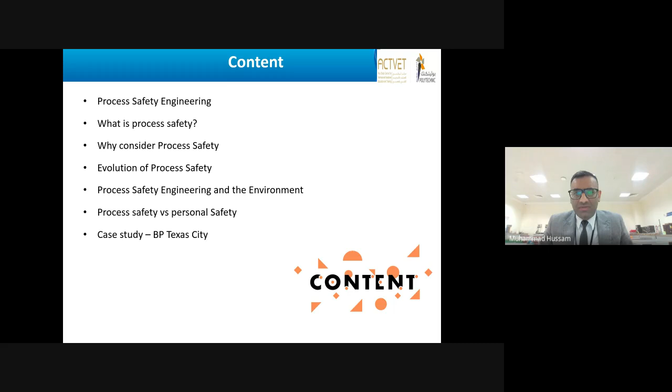And we also need to link it with the environment. All these processes, all these operations, they're linked with environment in one way or another. Are we taking into consideration whether our actions have any impact on the environment? Have we done proper impact assessment? Have we looked into what are the hazards associated, and so forth? So all these process plants, all these refineries, all this overall infrastructure has an environmental impact. So it has to be considered how it will impact the overall environment.

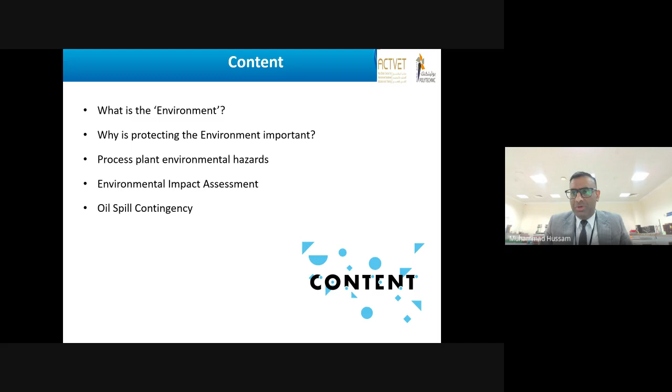So you're hearing in all sorts of different seminars, symposiums related to energy transition, related to green energy, related to saving the environment, saving the planet. It all boils down again to the operational excellence, how that operation or that process has been designed so that it has a minimum impact on the overall environment and so forth.

So we will try to look into an overview of process safety, safety engineering, and then process safety and personal safety. When we say operational excellence, it has to do with competent people as well. Are they trained enough? Do they have the right skills to run that process? Are there any training protocols? Do we have any safety protocols in that very environment that we're working in? So these things are linked together. So we have to see in a broad perspective how these things are linked. Now, going directly into the outcomes and so forth.

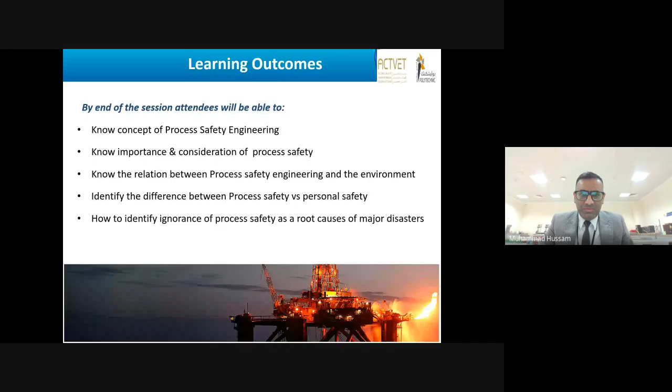So we want you to understand process safety engineering, the considerations, the relationship between engineering and environment, how process safety and personal safety are linked, and, in the simplest way, what the major root causes of any disaster are. It can happen in upstream, it can happen in midstream, it can happen in downstream. It's everywhere. So we have to consider operational excellence and so forth.

I'll just jump straight to the topic. So what exactly is process safety, and how is it linked with operational excellence? We can have multiple different things that can go wrong. We can have various accidents. We can have explosive materials that we're dealing with. We're dealing with high pressures, high temperatures, high flow rates, high levels. We're dealing with chemicals, different dangerous substances and so forth.

So overall, in a safe manner, I'll give you an example of getting a driving license. You go through a theory test, a practical test, then the test itself, and then you get a driver's license. Even when you get a driver's license, in your first few years you're very cautious about things that can go wrong, how to turn left and turn right and so forth. This is a very minor thing, a very small process, but it has lots of implications.

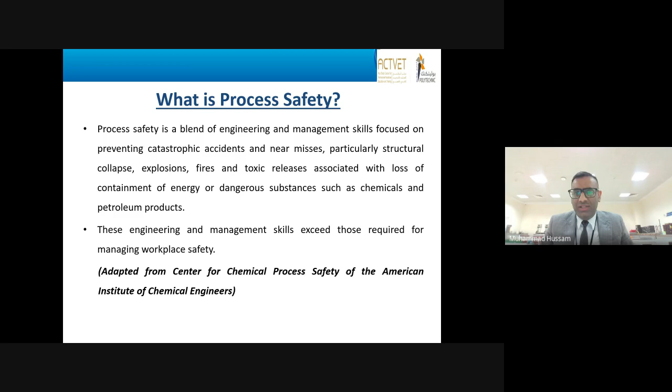If you don't drive safely, you're putting others' lives in danger as well. You can damage your own car, you can hurt yourself as well. So we have to consider the excellence in the process. We have to understand what we are trying to achieve, what exactly is the objective of the overall process that we're dealing with. There are technical aspects of safety, and there are management aspects of safety as well. So it has to be considered as a full spectrum, where we're dealing with engineering skills, management skills, and managing the workplace safely and effectively.

As I said, we're dealing with lots of different hazards in manufacturing facilities, processing facilities, hazardous chemicals. Maybe we're working at heights and so forth. Specifically, if you're working in an offshore environment, we have to consider the overall safety of the process, and at the same time, we have to consider the deliverables. Organizations and nations don't invest in something they feel won't give a return. So if we are not doing it in a safe way, in the manner it's supposed to be done, overall productivity will go down, profitability will go down.

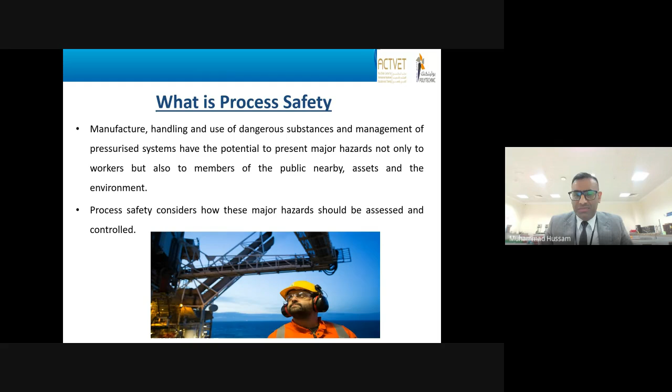We are exposing the public, our infrastructure, our assets, and also the environment to a situation which could be hazardous and dangerous. So we have to define the safety element, the excellence element, and then see where we are, how the overall process is designed and managed. It's a continuous cycle where we monitor, we learn from the mistakes, we report it, and we try to improve it. In the later half of the presentation, we'll look at some excellence protocols in terms of management and personal safety in a bit more detail.

When we talk about engineering itself, we have to consider the design and analysis of the process equipment we deal with on a daily basis, and the risks associated. There are multiple examples around you on a daily basis dealing with safety. We go to the doctors. Doctors have to be competent enough to give proper treatment. In surgery, a minor mistake can lead to a very serious health situation. Similarly, if we are not designing our process plant or facility in a safe and proper way, it might lead to a very disastrous situation.

So whenever any process facility is designed, they consider the worst case scenario, what could possibly go wrong, and do we have contingency plans: plan A, plan B, plan C? Do we have dedicated people who will respond to an unexpected situation? Do we have sensors or systems in place which can inform us at the right time, so we can save the overall process? And the processes are linked with each other. Take the example of drilling. Everything is integrated with each other.

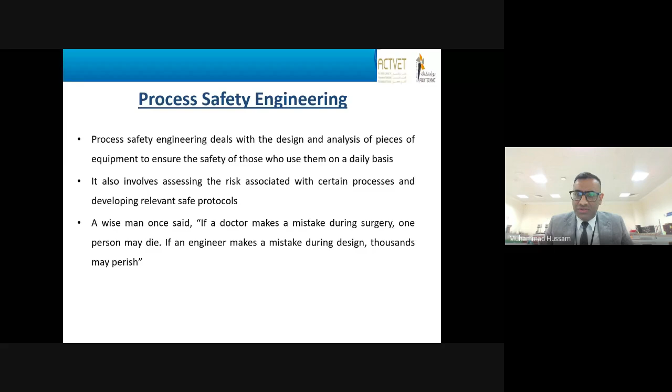If the BHA is not working, or if the BHA is clogged, it has an implication in overall drilling of the well. If for some reason the annulus is blocked and we are not circulating properly, that also has implications. If the drilling mud is not the right density or the right specific gravity, we are losing hydrostatic pressure. So everything is linked together. When you design it, you design every element in the right way, and everything has to complement each other so that the overall process is as safe as possible.

Why do I need to consider process safety or process excellence? Threat of serious injury or fatalities, loss of production, legal actions. These days, different nations are very strict about safety regulations, and if you're not doing it in a safe manner, then there are legal implications as well. You have to pay hefty fines. There are lots of examples where there were spills in the seas, and the companies had to pay literally billions of dollars as part of the legal action that was taken by the nations.

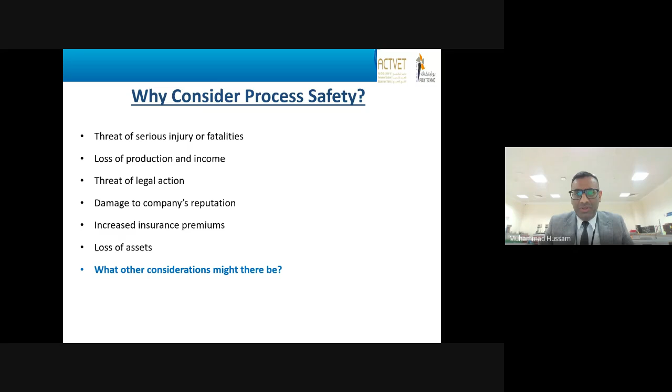The overall company's reputation can be damaged right away, that this company is not working in a safe manner, they don't have the right skills, or they don't have the right attitude to work in a proper way. And all these big infrastructure facilities are insured, so your insurance premiums can go high as well. Loss of lots of assets, and so forth. So there are lots of considerations. You're a student, working or studying in different domains, so we have to consider all these safety aspects.

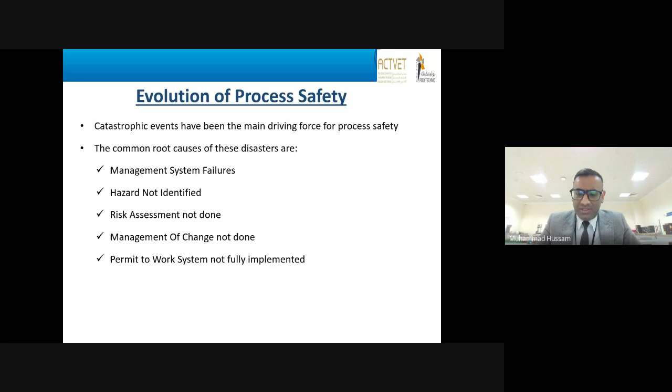So, evolution of process safety. There are various events that have led to where we are right now. We have various disasters that have led to, let's say, management system failures, hazards that are not identified, risk assessment not done properly, management of change that has not been done, permit to work systems that were not implemented properly. So we have learned so much as part of process excellence over the years. These are some of the case studies of events that have happened over the years.

There was the Flixborough event in 1974. It led us to understand what hazards are, management of change, impact, and so forth. We had Seveso in 1976, where lots of chemicals were released, and protocols were established related to vapor cloud explosions. Then in Mexico City, there was a boiling liquid expanding vapor explosion, and so forth.

That has also led to understanding the protocols about how the liquid has to be expanded or stored, and so forth. Then there were some refinery incidents, specifically Bhopal, and then BP Texas refinery as well, that led to very serious consequences. Piper Alpha, that's a platform offshore oil rig that was burned, also had lots of consequences.

So the safety process or the excellence process has evolved because of these incidents. Each incident is an excellent case study to understand what went wrong, why that has led to where we are in that particular situation.

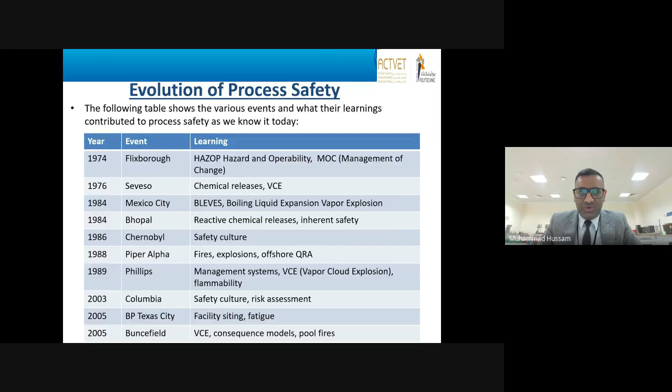This was a Chevron Richmond refinery. If you watch this short video, you can think about what impact it had on the environment and what management did. They already knew there was significantly something wrong in the distillation column, and they did not look into the overall maintenance of it, record of maintenance, and these incidents could have been avoided.

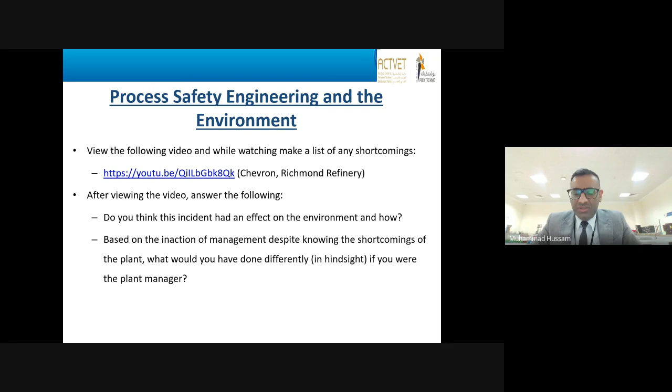Just because we don't have the right attitude at that moment, because of the cost implications, because of the management issues, it has led to very serious implication, and that has caused both the damage of the equipment, loss of property, loss of the lives, overall.

Personal safety and process safety, both of them are linked together. In terms of process safety, we have to consider what processes, what are we dealing with? Are we dealing with extremely dangerous chemicals? We're dealing with high temperatures, we're dealing with high pressures, we're dealing with overflows, what exactly the overall objective of the process is.

Also what can go wrong. Do we have the right knowledge? Do we have the right experts? Do we have all of the right tools available? Do we have training infrastructure? Do we have continuous improvement, and so forth?

And this is an expensive thing. As I said before, companies do not want to invest in something where they feel that the returns are not going to happen. If you're a businessman, you start a business and put in a certain sum, and at the end of the month you're expecting a certain return. If the return is not there, it means your business is in loss, and you want to look into some other resorts, or other potential businesses which can give you a return.

Similarly, process operational excellence is linked with process safety. If we are not working safe, there will be lots of downtimes. There will be people who have lots of injuries. There will be high insurance premiums, and overall it will be expensive.

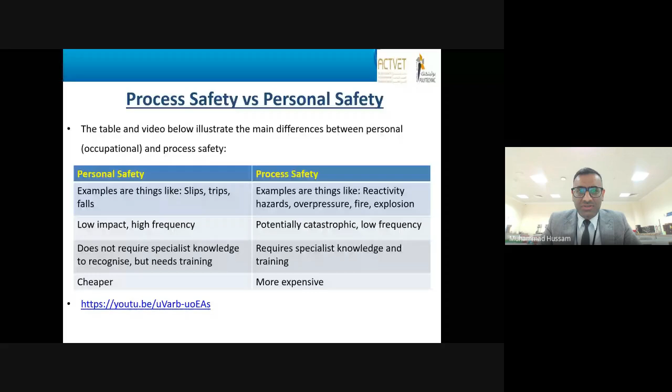I'll give you a brief overview of what happened in BP Texas refinery. It was a flaw in the distillation tower or distillation column, where the pressure was not sustained. As you know, in refining, the temperatures can exceed very high, and if the pressure is not sustained, the vapors can blast. That's exactly what happened. Since we are dealing with refining crude, there were various fractions, and the pressure was not sustained.

There was a flaw in the distillation column design, and that led to BP's Texas disaster. I think 15 people lost their lives. These are very classic examples that show we have to consider safety and operational excellence in almost every aspect, specifically when dealing with bigger infrastructure where energy and environment are linked together. This was one of the figures I found from the Texas refinery.

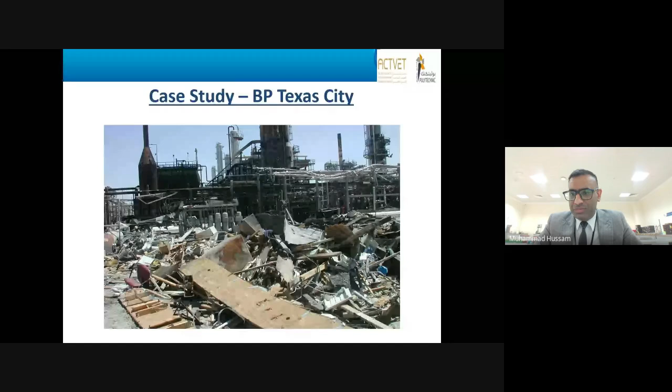So you see the overall loss of lives that occurred. The infrastructure was damaged, and then they have to pay legal implications. They have to pay lots of fees as well.

Now what are the pillars we want to see as a general understanding of success when we're talking in terms of operational excellence? We have to understand the core principles, the real plant applications, what we're trying to achieve. We have to identify the challenges, and also identify the solutions.

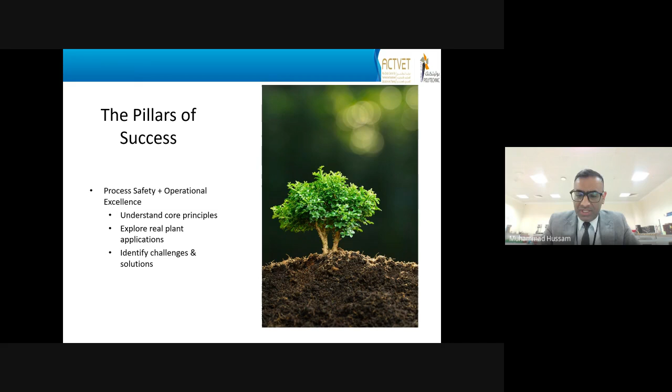In terms of challenges, for heating and cooling, do we have the right capability? Do we have the right storage? Do we have the right infrastructure? Do we have the right capital? Are we managing the cash flow and so forth? There are lots of things in terms of process safety and operational excellence, and they go hand in hand. If we don't really understand the principles, then we are not able to identify the challenges, and we cannot provide the solutions.

Simple process safety: we have to identify the hazards. Hazard identification needs to be there. It's a very simple matrix — first we need to identify a hazard, what is its likelihood, what is its severity, and based on that we can identify whether it is a low frequency hazard or a high frequency hazard, or whether it is likely to happen.

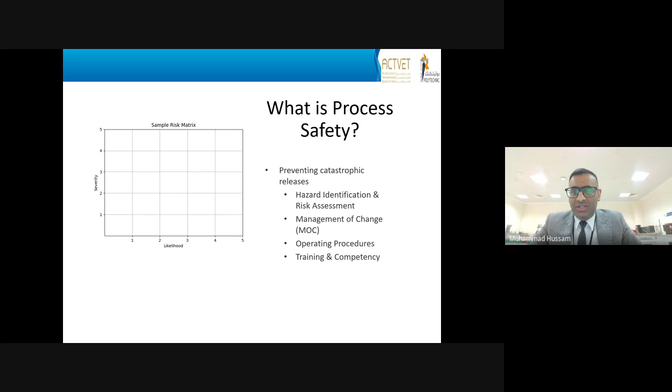Once that's done, the management has to consider what practices they need to put in place for overall process safety and operational excellence. Then operating procedures — do we have them in place? And training and competency — every step has to have training, and there has to be competent people to make sure they're doing things properly and are trained.

This is a very interesting thing, which is hazard and operability study, that we have to again identify. There could be different calculations of it. There are different examples of it. There are different benefits and so forth. So these have to be considered accordingly.

So if we say risk calculation, we have to consider the preparation. The team has to review it. They have to identify the hazard, and they have to evaluate the risk and so forth. Based on that, we are basically considering it.

For example, an overpressure in a reactor — is it major? Is it possible? Is it something which is hard to detect? And do those inefficiencies exist, or do we have safety norms in place?

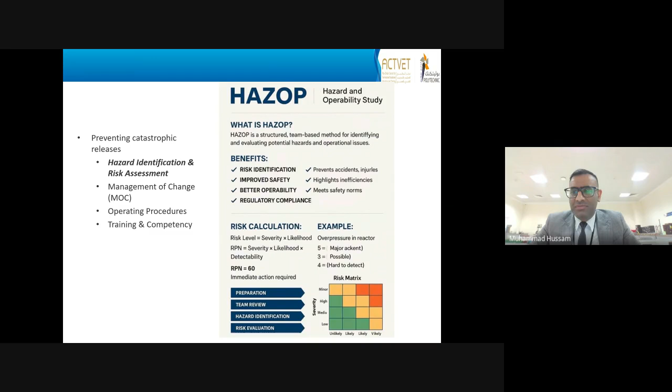So this is something pretty basic for any industry we're dealing with. HAZOP has to be structured, it should be able to identify and evaluate operational issues in any process plant.

Then management of change. This is basically related to how we document the overall process. Do we have a certain approach where we identify things, and then see what incidents and operational disruptions occur? We review the risks, and then do we have a change? Do we have risk assessments, and based on those, a structured approach where we do approvals, disapprove, implement, and there has to be a review process.

Another example is accreditation. When any accreditation body comes to a facility, they will look at what we are doing and how we are doing it, and to back this up we need documents, and those documents have to follow certain protocols and SOPs, giving evidence that it's there.

In big process facilities, whether petroleum refining, manufacturing facilities, or chemical reactors, there has to be a chain of command. There has to be management in place to approve, review, and monitor on a daily and monthly basis, seeing if targets are met, what the downtimes are, whether we have maintenance logs for these facilities, enough capital to cover costs, and agreements or proposals in place for if something goes wrong.

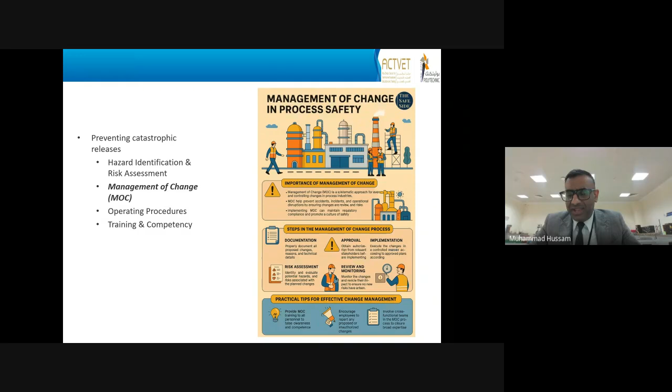So identifying hazards, we need to implement these processes for operational excellence. Operating procedures, training, and competencies are an extremely integral part of overall excellence. In any organization, if you're just sitting in one place, you're not learning or growing in your career. Same goes for these process plants. They have to upskill as technology changes.

For example, in terms of energy consumption for a certain process, if you look ten years back versus now, the sensors are more integrated, they consume less energy, and they give you a better experience. So these plants have to upskill and upgrade their facilities every now and then, and also upgrade the people who are there, making sure training happens.

The training and development has to be there, with proper support and clear goals. The learning has to happen, and it has an impact on overall operational excellence. If people are competent and their skills are developed over time, it means we are doing something right towards achieving operational excellence.

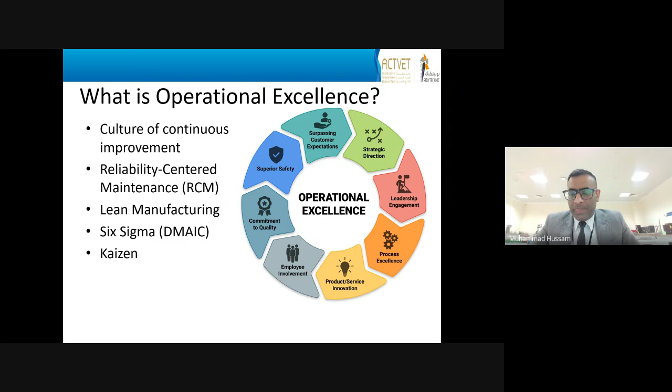In terms of reliability centered maintenance system, the first thing is operational excellence, which comes with cost effectiveness and making sure we have proper, improved reliability procedures in place. People are communicating with each other, there are proper documenting procedures, resources are available, and you have clear objectives. If the objective isn't there, it means we're not monitoring things properly. Things have to be monitored, documented, and reported properly, leading to excellence across operations like refining, drilling activities, and downstream distribution networks—everything is linked with these major terms.

This is another aspect of the manufacturing model, where we have continuous improvement, value stream, and flow, pulling things together. In the middle, there's a proper culture where we respect the people, promote them, listen to them, and give them the right resources, skills, and safety equipment.

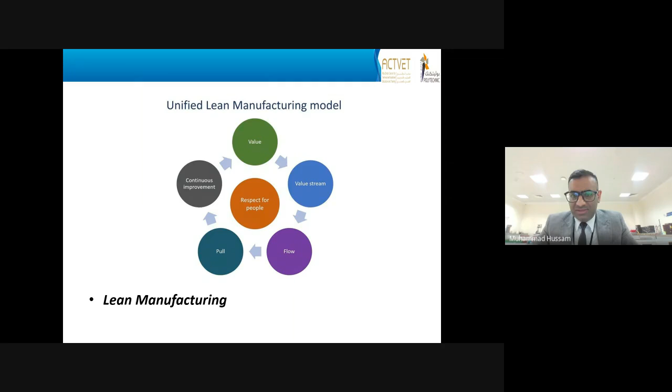It has to be according to certain specification. If those specifications are not met, it means that we're not doing something right. There's no continuous process in place. If we see there is a discrepancy, we have to report it and we have to try to mitigate it. And overall, these things are linked together in order to achieve operational excellence.

These are Six Sigma, let's say, frameworks. We call it the define, measure, analyze, improve, and control framework. These terminologies, they look very simple. But if you look into it or try to understand it in a bit more detail, you'll see that things can be very simple, but we can make it very complicated. Define the problem. What's the problem?

If, let's say, your car is not working, there could be hundreds of things that can go wrong, related to engine, transmission, related to electrical systems. So we have to define the problem. Where is it? Quantify it. What's the likelihood of it? What impact does it have on the overall problem? Then analyze that problem. How can we improve it? The cause of it.

Then again, here risk assessment comes very handy. And then you have quality improvements, continuous quality improvement. You improve it, you implement the strategy. If that strategy doesn't give you the results, then you go back in and analyze it again and see where we went wrong. And then we have got proper control of the overall procedures, overall practices to get the excellence we need,

and so forth. So these frameworks, they're, let's say, simple, but when you're executing them, you see that there are lots of technical challenges. It's not as simple as this; we might have a challenge of, let's say, a technical drawing. We might have a challenge related to extreme pressures, extreme temperatures where we're not able to see the root cause. We are unable to give the output that's there. So we have to identify, define, and control, and so forth.

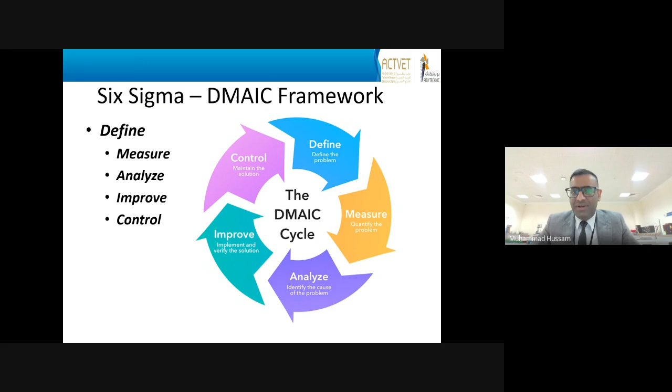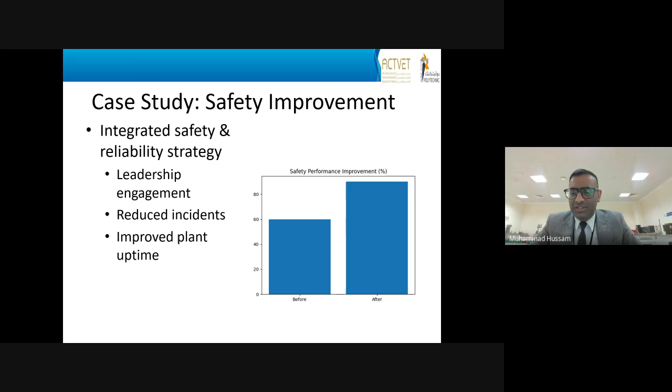and so forth. And we can look into various different case studies around the world in process plants, in refineries, in chemical manufacturing facilities. They can lead to lots of these integrations, and so forth.

This is another important thing: when we say integrated safety and reliability strategy, what exactly do we mean by that? There are lots of things, as simple as, let's say, we don't really bother about that problem. We can have a reactive approach. There is an effective approach. There could be a proactive approach, and there is an enlightened approach as well. So it's about the discipline. It's about realizing your mistakes. It's about having the processes in place, and then continuous improvement.

For example, our graduates, when they go out, we have an exit exam, and that exit exam gives ABET an idea that we are looking at the quality of the graduates that are going out. And for each course, at the end of the course, there are surveys. The management looks at those results, and based on those results, they see what is the performance of the employee, what is the performance of the teacher, and also the performance of the students.

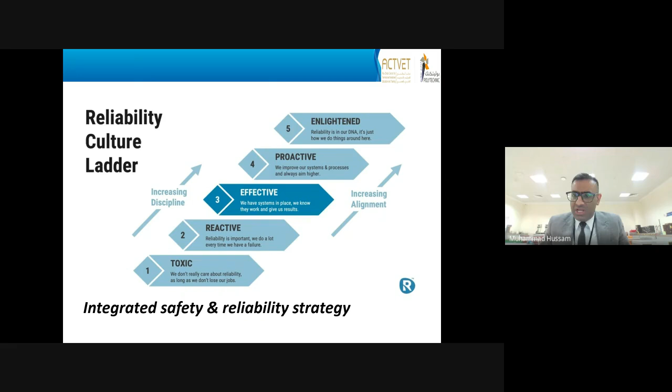So there are policies and procedures in place in order to improve the overall excellence, overall reliability, and so forth. So these things come with the personal attitude and also the organizational attitude, whether they have these things in place. Now, a last couple of slides related to the future of plant operations, what is going to happen, or what is actually happening right now.

So you see, we have these fancy technologies, artificial intelligence, machine learning, cloud computing. We have lots of data that we want to analyze. We have digital twins, just like RTsim. They're doing that, so the students can get themselves trained without being exposed to the real environment. We have AR, VR, augmented reality, virtual reality, remote monitoring, Internet of Things.

So this is where the world is heading, towards more automation, where there will be less and less human involvement. The human aspect is going to be there, but there is more artificial intelligence that is going to take decisions. If you look around yourself as well, we as educators are involved in this AI a lot. We are depending on it. It's a good thing and also a bad thing at the same time. But we have to embrace it. If you don't embrace it, then you're basically left behind.

So in terms of digitalization, there's more predictive analytics, where rather than doing it manually, based on analytics, you can do predictive maintenance. Smart maintenance systems are there, artificial intelligence that can report every 6 hours, every 12 hours, every 24 hours. So there's no need to do the rigorous work. So it's better in terms of plant operation.

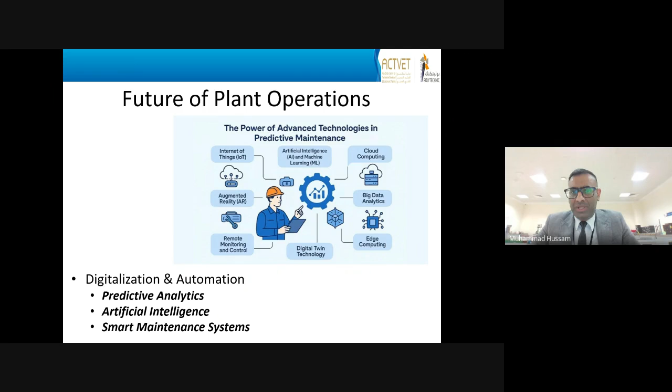But I don't want to bore you with another 15 minutes or so. So I'll be happy to take any questions. I think the time is almost there as well. So in the last 5 minutes or so, I'll be happy to take any questions, please. Of course, you're not making us bored, Mr. Muhammad. Actually, the lecture was wonderful. Thank you so much for this useful information. I'm sure our participants will keep it in mind.